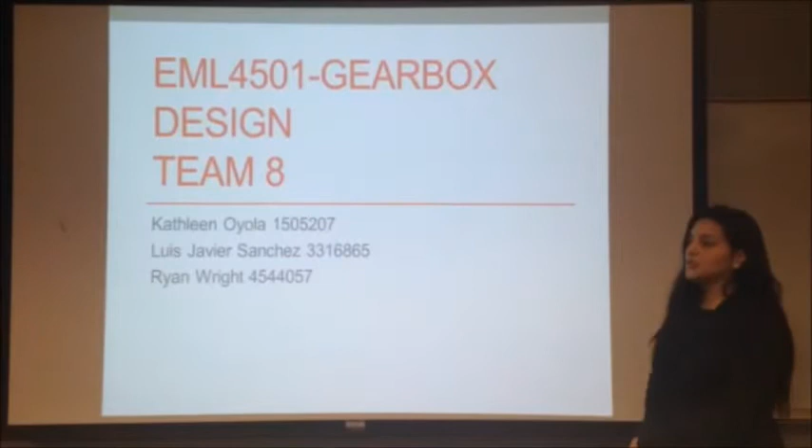Welcome, we're team number 8 and we'll be presenting our gearbox design. Our team consists of Wright, Sanchez, and myself, Kathleen Oyola.

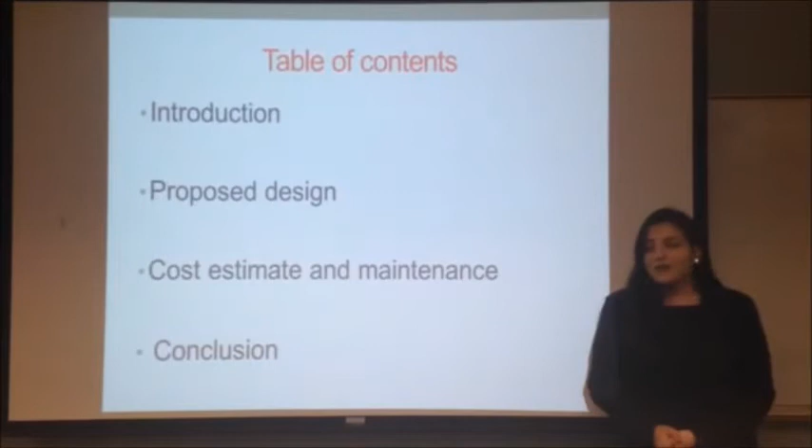We're introducing our proposed design with schematics and calculations, our cost estimate and maintenance of each material, and the estimated cost of manufacturing, and it will end in conclusion with the overall design. The gearbox design has to follow specific requirements.

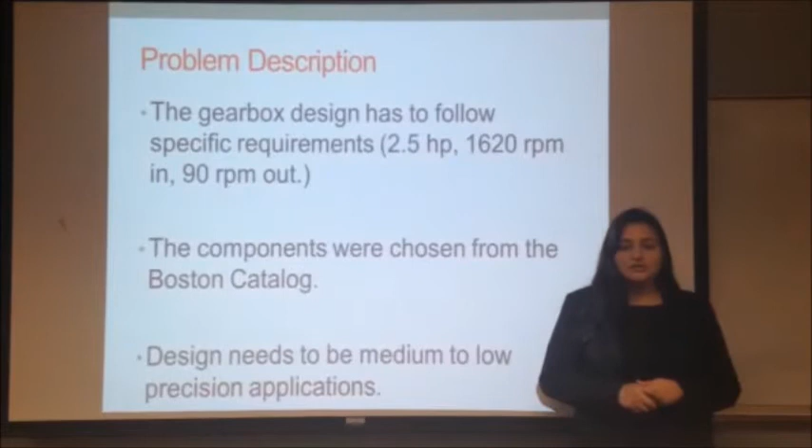It needs an input of 2.5 horsepower, input shaft speed of 1620 RPM, and an output shaft speed of 90 RPM. The components that we chose for this design are from the Boston catalog, and this design needs to be for medium to low precision applications, and has to work in 90 to 95% humidity.

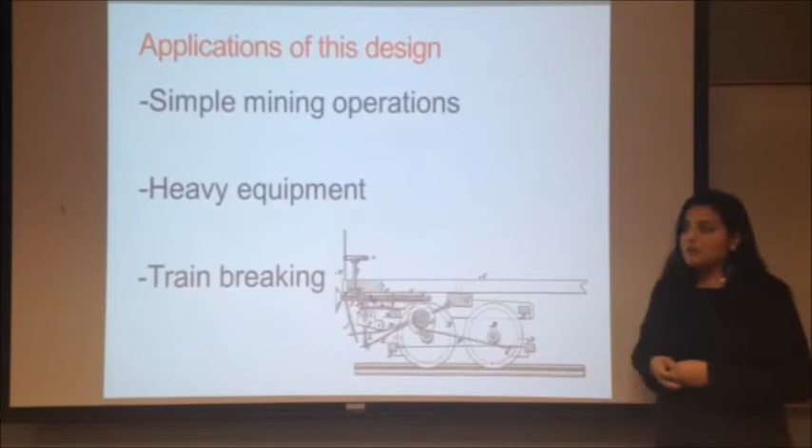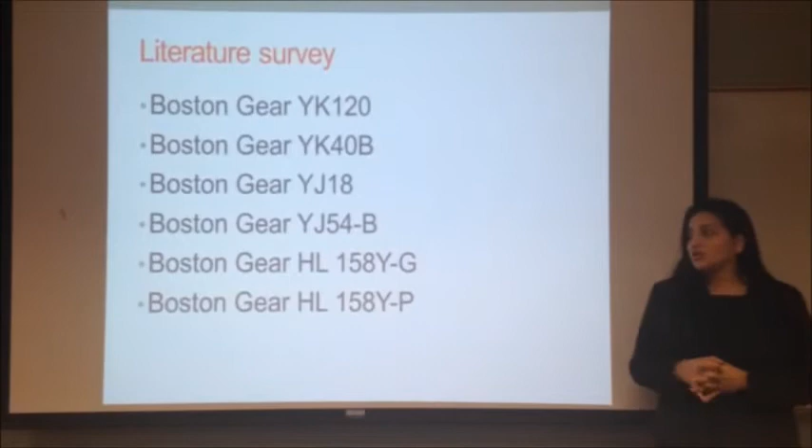For our literature survey, we'll be showing the gears that we use. We use 4 spur gears and 2 bevel gears with a 20 degree pressure angle, and the bevel gears to change the direction of the gears. So as my partner said, we are going to have 4 spur gears and 2 bevel gears.

Our first set is going to consist of 2 spur gears with a ratio of 3:1, because the teeth number is 120 and 40 for the pinion, turning at our input revolutions per minute, and the second one turning at 540 revolutions per minute. Both are made of cast iron.

Our second set of gears are bevel gears made of hardened steel with a ratio of 2:1. Our pinion has 18 teeth and our gear has 36 teeth. The 36-tooth gear here is turning at 270 revolutions per minute.

So our third set, finally, we have 2 spur gears. One is made of cast iron, that is going to be our gear, and our pinion is going to be made of steel, with a ratio of 3:1, because the teeth number is 54 and 18. And finally, in our last set, we have 90 revolutions per minute.

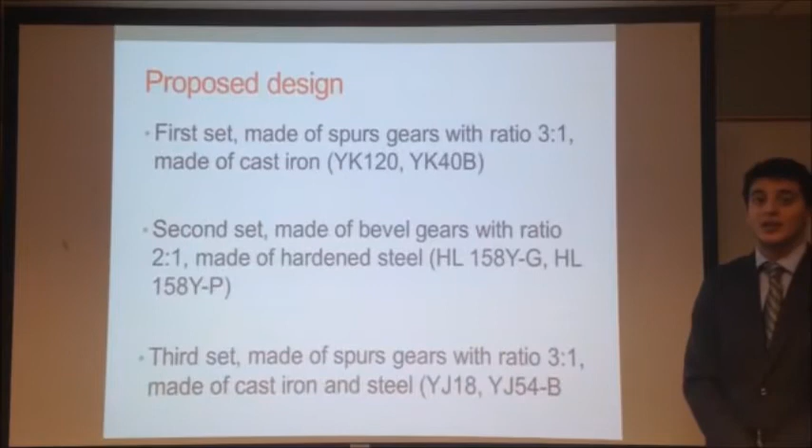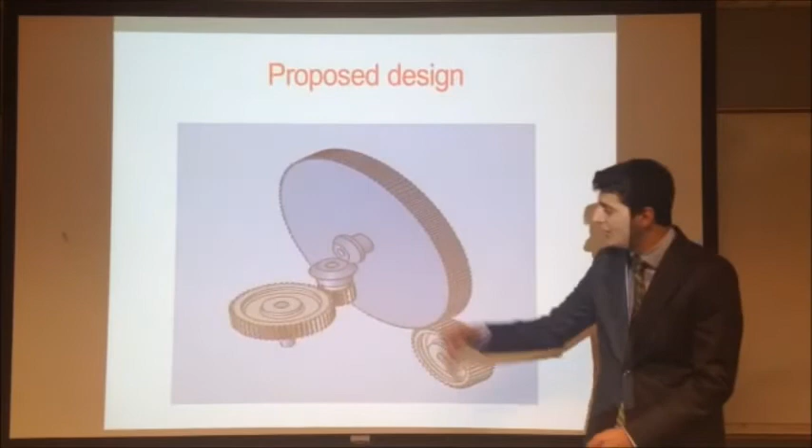So our proposed design starts here with our cast iron pinion of 40 teeth and our 120-tooth gear. These are our 2 bevel gears, changing the angle to be perpendicular per our specifications. And finally, our last shaft. So this is an engineering drawing, just to see how everything is mounted.

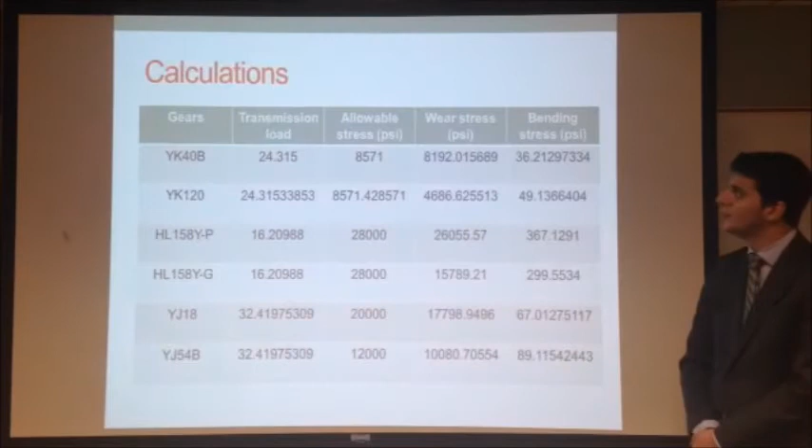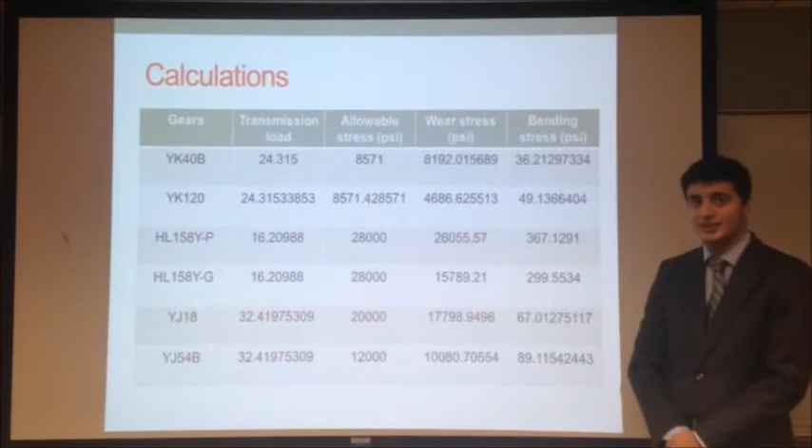So in our calculations for every gear, we got the transmitted load that they are going to suffer, and this is the allowable stress in PSI for every gear. They are based on the material: cast iron, hardened steel, cast iron.

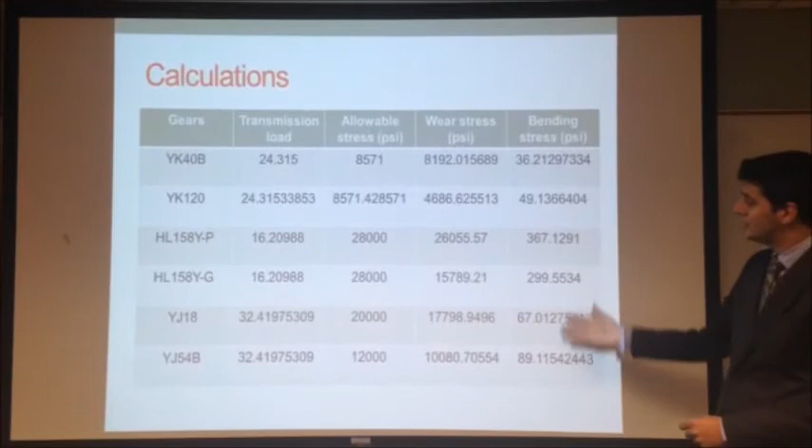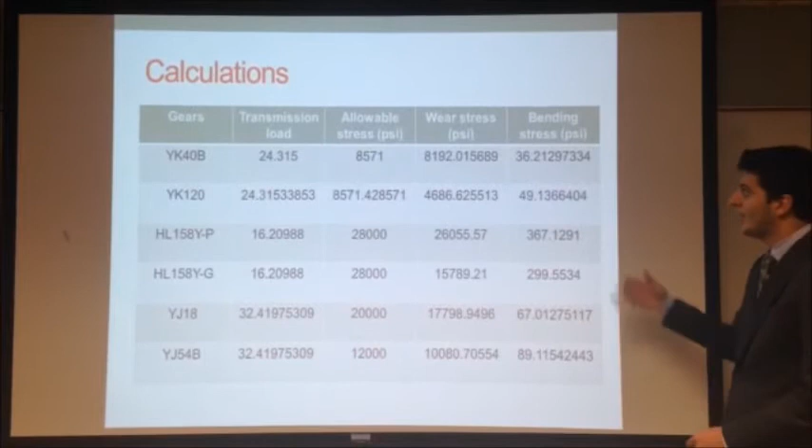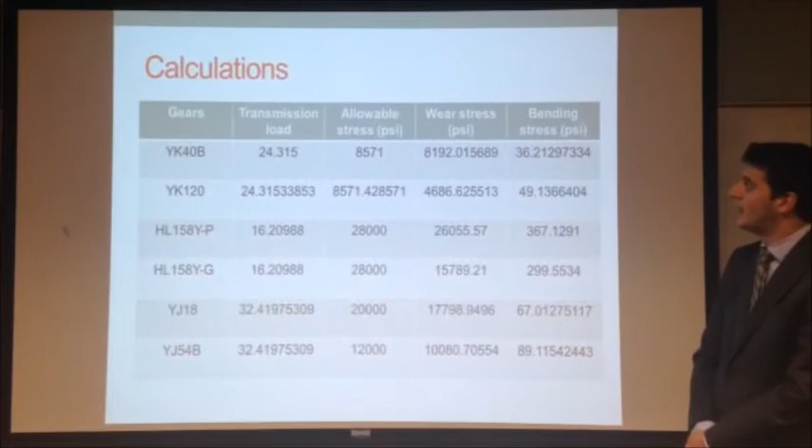So on these 2 calculations, the wear stress and the bending stress, we got those results thanks to all our constants. And as we can see, the stresses are in the range of the allowable stress. They are all smaller than our allowable stress, making our system valid and efficient for our purposes.

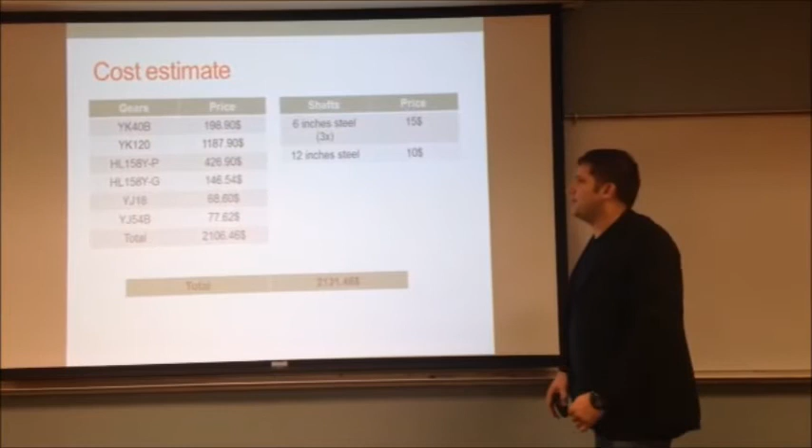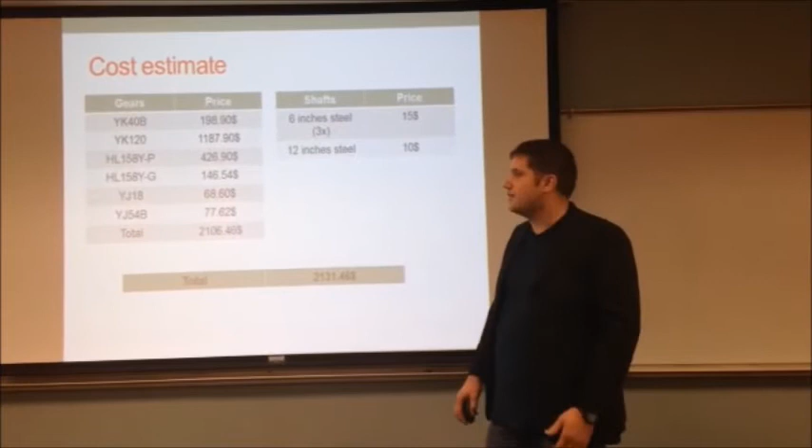So right here's a quick breakdown of our cost estimate for our gears. As you can see, our most expensive gear is just over $1,100, and that'll bring our total cost for our system up to $2,131. The price of the shafts is not that expensive compared to the gears, because there is a lot of precision there. Also, we had to use really wide gears for a large face to account for distributing all the stresses.

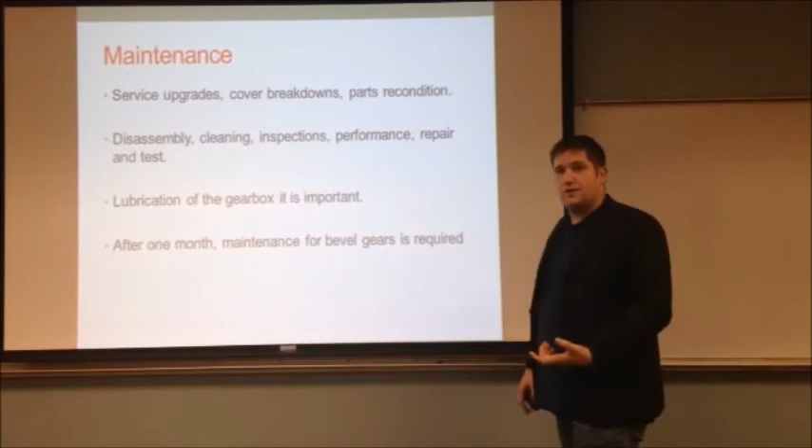If you look real quick at the maintenance, our maintenance includes service upgrades for the bearing systems, lubrication, things like that. It accounts for disassembly, lubricating the gears, making sure they're properly greased and alignment is there. And due to the bevel gears, the pinion's going to end up failing after about a month. So with that happening, it gets into a caution area, and it should be taken apart to look and make sure that everything's safe.

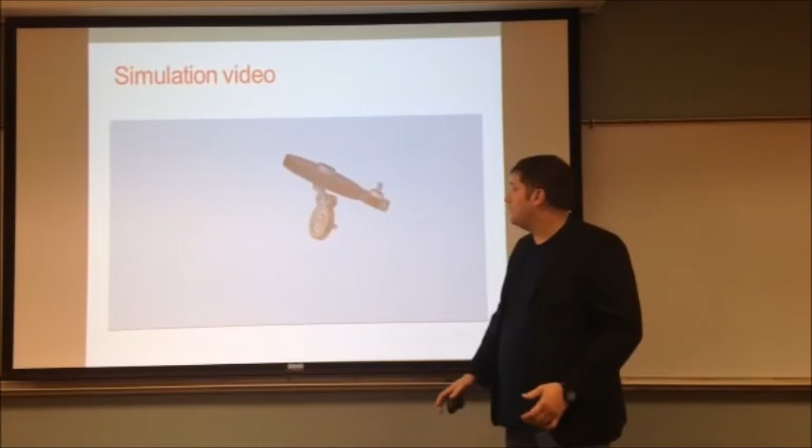This is a quick simulation of our gears, which, as you can see, this one here is spinning extremely fast, but it does end up being an 18-to-1 reduction, bringing our speed from 1,620 RPM to 90 RPM for the output.

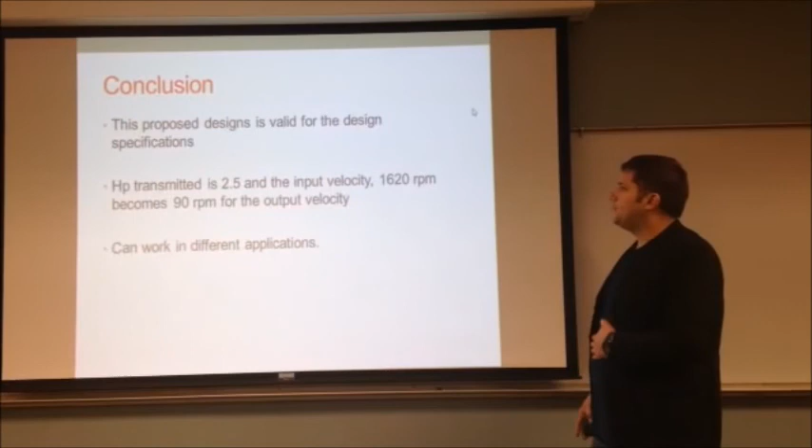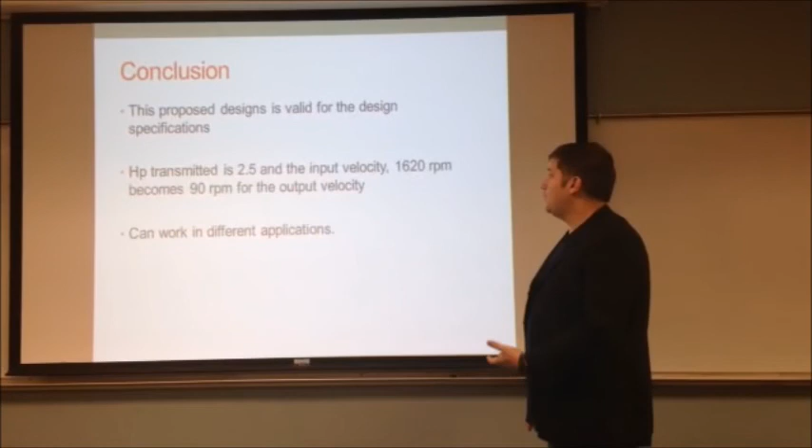This proposed design is valid for all these applications, including heavy machinery and mining equipment. Horsepower transmitted is 2.5 horsepower with the input velocity of 1,620 RPM. The output velocity is 90 RPM, and there are many different heavy-duty industrial applications that this system can be used for.